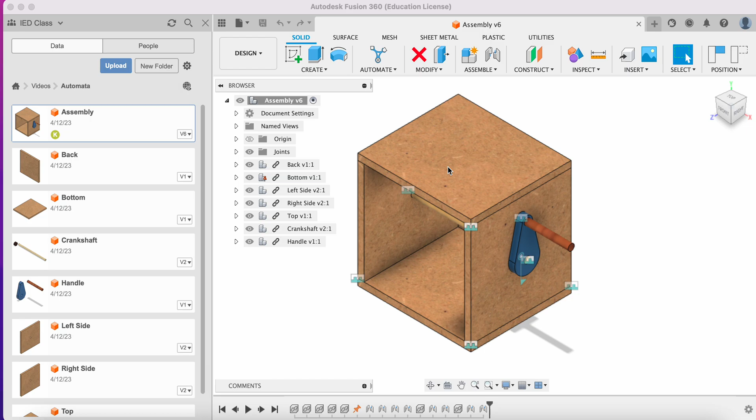Let's go ahead and open the top box file here, because we need to go ahead and insert a row of holes along the top. So let's go ahead and create a sketch right on that top plane, and I'm going to rotate this just so I can see it nice and long ways here.

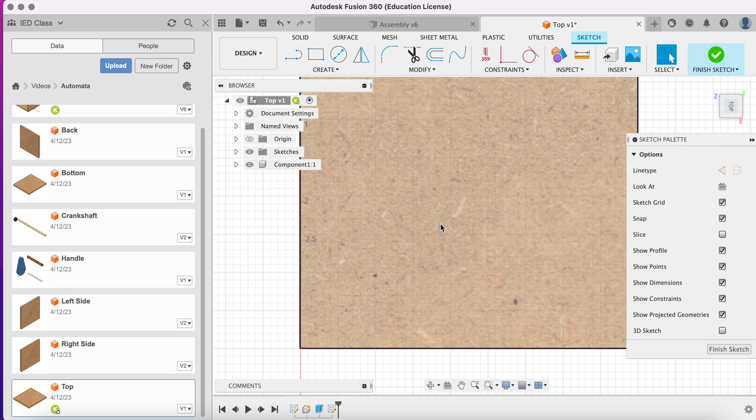Next up, let's take a look at, well, I'm having trouble zooming out. That's a problem, because I just want to see my whole box. So we're going to place a row of circles here, let's find that midpoint and drag along, and let's place a 0.25 inch diameter hole, and let's dimension from the left side to this as 0.58.

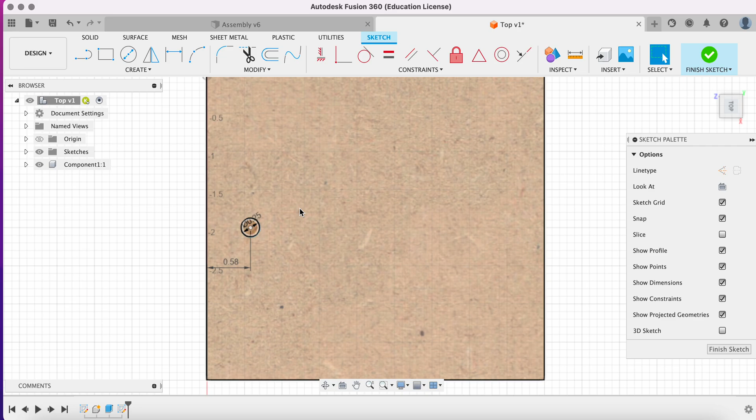And then what we could do is we could certainly go through and place 5 more holes and dimension between every single one of them, but that could get a little tedious. So let's go ahead and try to apply a rectangular pattern.

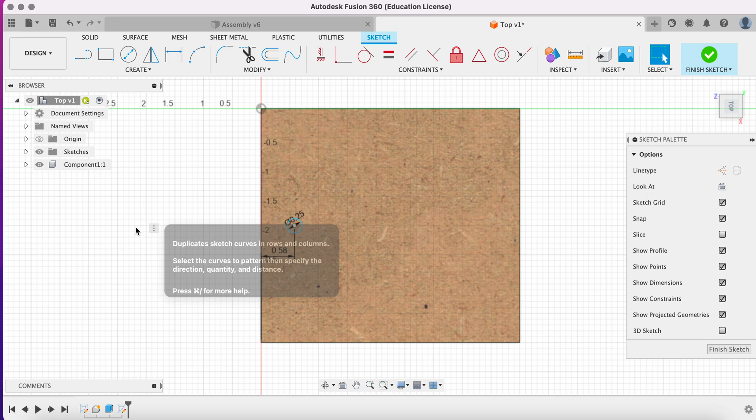So if you go under Create and choose Rectangular Pattern, the first thing that it wants us to select is the object, we want to repeat these circles. Next up is direction - oh, there are a lot of things underneath here, let's expand that, there we go. The direction, so I do want it to be horizontal, and I want it to go this way.

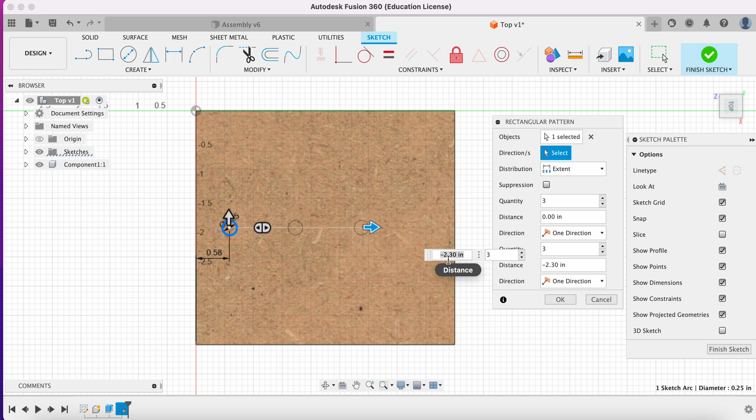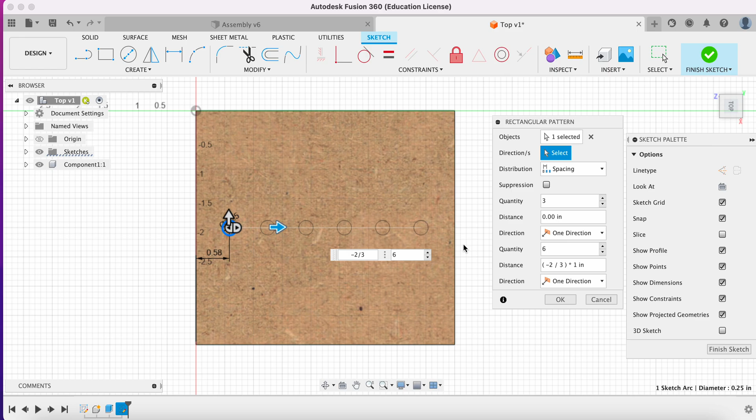Next up, they have a specific distance for us to put in, but I think I just want the extent to be spacing, based on a negative 2/3 of an inch. And instead of 3, we need a total of 6, because we made 6 cams, so we want to place 6.

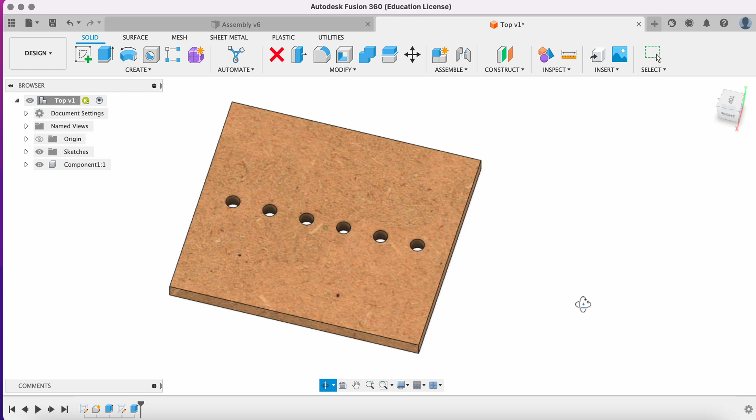So then go ahead and click OK. And now when we finish the sketch, we can extrude all 6 of these at once. So let's go ahead and click on all 6, and we're going to cut through and click OK. And now we have 6 holes for the follower rods to go through. So go ahead and save this up.

And let's head back to the assembly. Now, of course, to get those holes in the box, we do need to update. All right, so our box is looking really good.

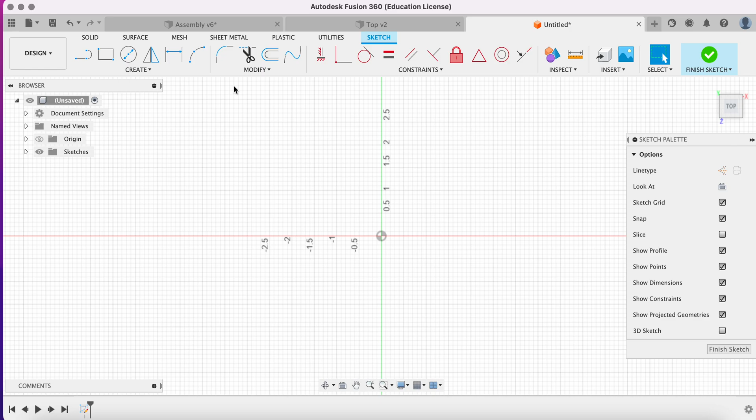Let's add a new design space, and let's make those follower rods. So create a new sketch, and I'll create a circle. And again, this needs to be a 0.25 inch diameter. And let's extrude these 3 inches. Create a new component, of course.

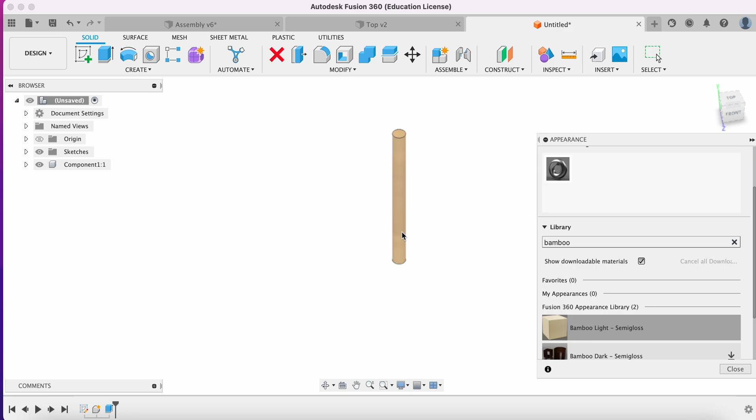And I'm going to have these made out of bamboo for my appearance. All right, that looks good. And let's go ahead and hit, well, we can save it, but we don't just want a flat spot on the follower rod. We do want there to be a rounded end to just ride smoothly along these cams.

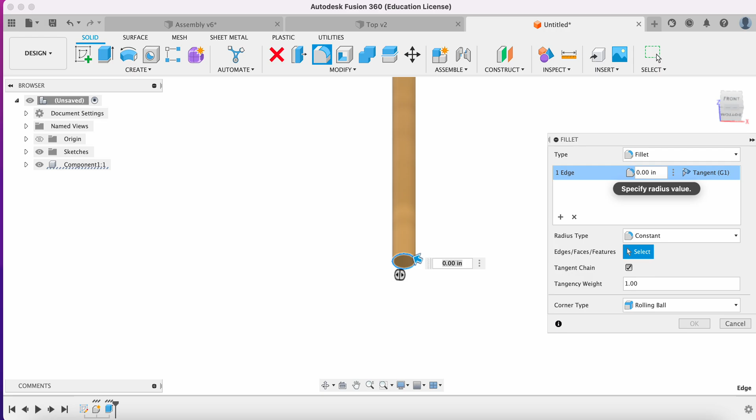So on the bottom here, I'm going to apply a fillet. So in the Modify panel, we're going to choose Fillet, select the circle at the bottom here, and change this radius value to be 0.25 divided by 2. So changing that radius amount, that makes it pretty smooth and kind of rounded.

And let's go ahead and save this as follower. And if we head back to the assembly, I do need to show my data panel again so that I can choose my follower to insert into current design. And it brings it right on in. And I'm going to click OK.

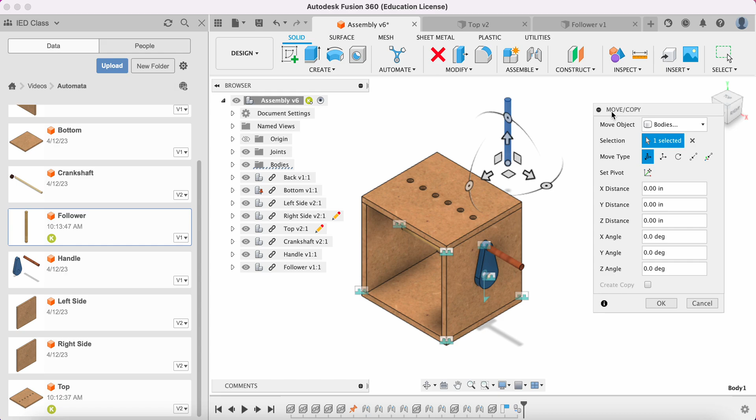And now I want 5 more of these. So yes, I could insert 5 more, but that can get, again, pretty tedious. So we could try to essentially copy and paste. So I'm going to highlight this, choose Command C, or for you it would be Control C and Control V. Click Capture Position is fine. And then when we drag it away, we see there are actually 2 separate followers here.

So that looks good, except I don't like how this came in. Okay, I'm going to delete that second one. I want it to pop up. How did that come in? Oh boy.

Did it lose the fillet? Oh boy, that's not great. Let's delete the fillet. Okay, let's try that again, because I highlighted all of it.

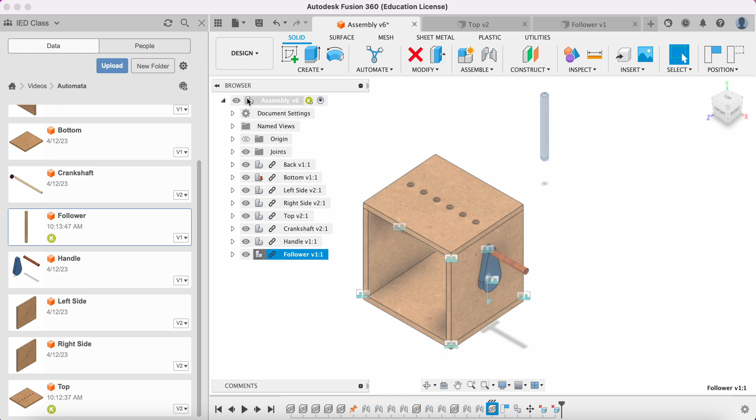Okay, if something isn't working quite right, let's try a different way. I'm going to left click on the follower here in the data panel, the browser panel, then right click and choose copy. Then I'll click on the assembly all the way at the top, right click, and choose paste. Capture position is fine, click OK. Now these came in the way I wanted at the bottom.

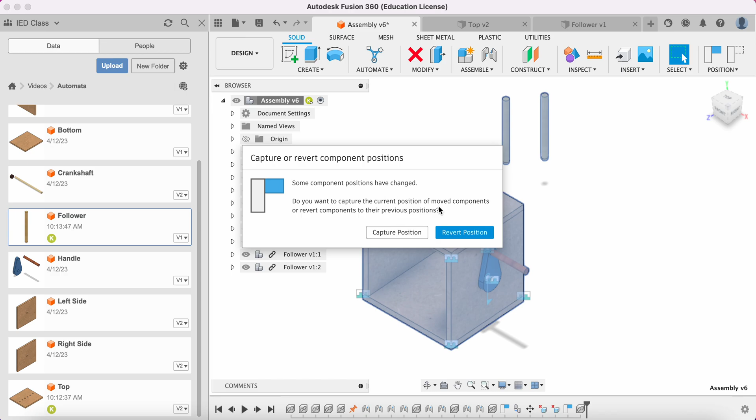Let's do that same process again. Right click, copy, right click all the way at the top, and paste. Capture position is fine. Okay, so we've got 3.

I'm going to try Control V one more time. Yes, and now that it knows what we want it to do, it's doing it correctly. Control V again, you can drag it out of the way, click OK. Control V one last time, drag it out of the way, click OK. We should see 6 followers down here. Make sure nothing else weird happened in there.

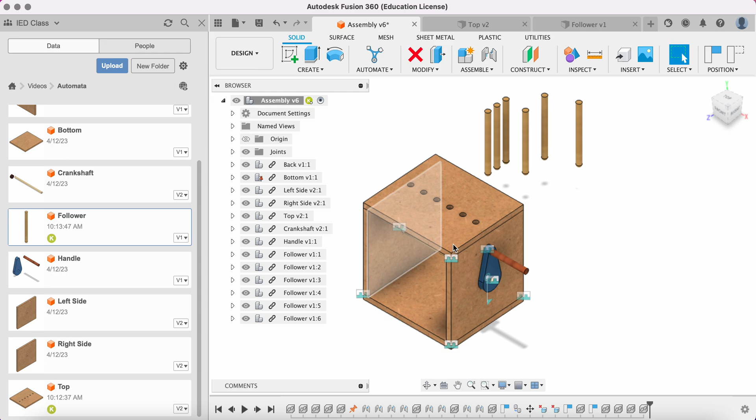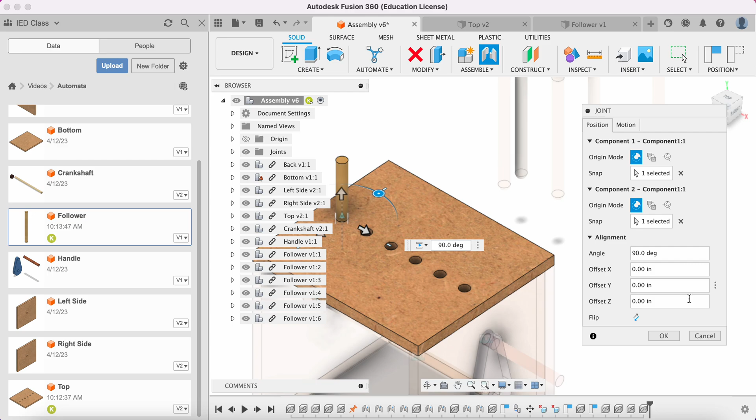Next up, we need to place a follower in each of these 6 holes. The joint we're going to apply is a slider joint, because we want it to slide along the vertical axis. When we click on position, click the middle of the follower for the snap point, then the center of the hole. If you want, you can preview the motion — that's exactly what the follower is supposed to do. So click OK.

And then we'll do that same joint again, right from the center to the hole, making sure the rounded side is down. If you constructed it the same way I did, it should be pretty automatic there. Looks good.

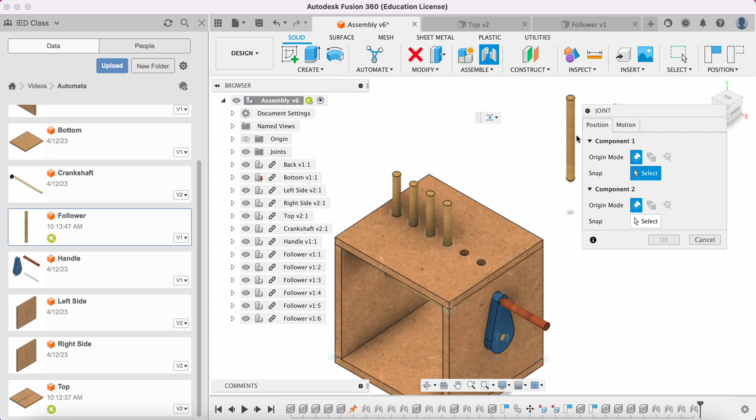And good, last one. So we now have all 6 followers in place, and they all have the correct motion. You can see the little arrows indicating that they are sliders.

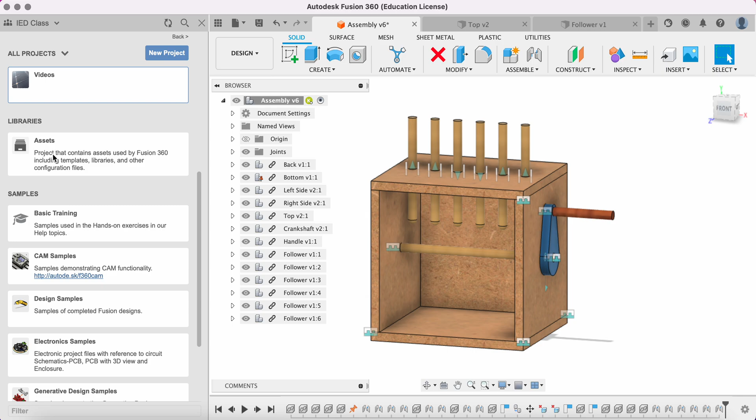Now let's go ahead and bring in our 6 cams. You might have to do a little searching in your projects for where you left off with your cams. Well, that's not where I left mine. There we go — I'm going to right click and insert each of my 6 cams.

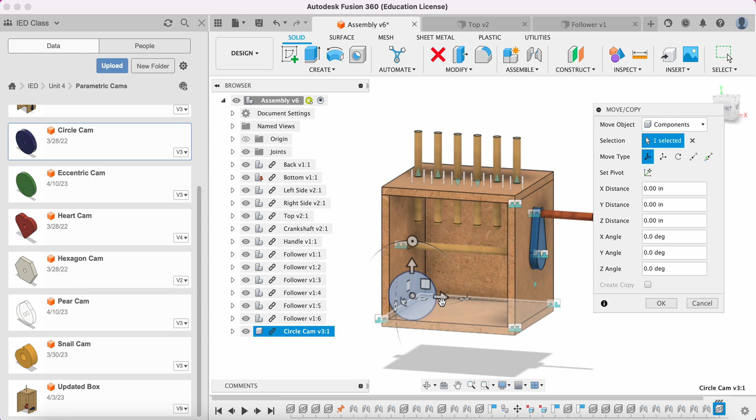We know that the circle cam's motion graph isn't very interesting, but bring it in anyway. Mine ended up back behind my box. Okay, eccentric cam — the order you bring them in, or the order you place them on your automata, does not matter. Just bring all 6 cams in.

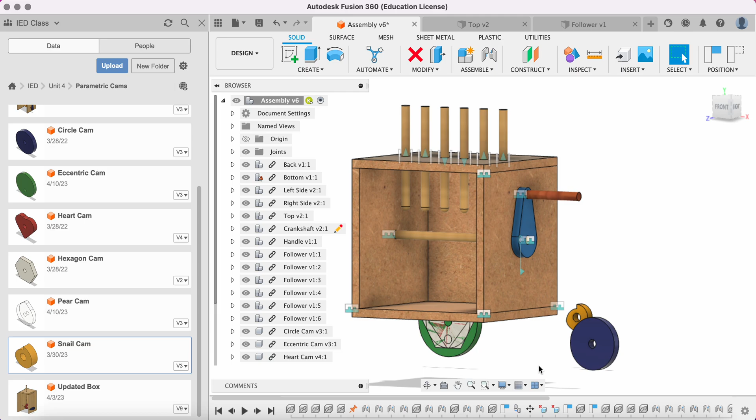I set them as different colors just because I think that's interesting — you can open up your files and set their colors differently if you'd like. The other thing is to make sure they're all sized so they'll fit in the box. You may need to go in and update your parameter D to be about 2 inches or less. If it's something small, that's fine, it doesn't have to be huge — 1 or 2 inches for that D parameter would be just fine.

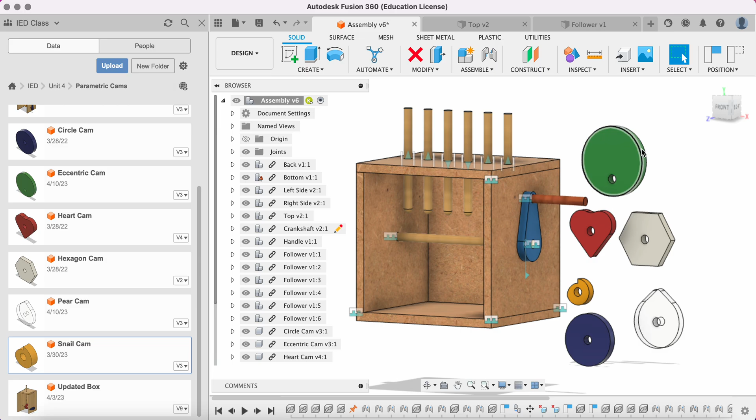All of these cams are going to be rigidly attached to the axle because we don't want them to slip — we want the axle to drive them and actually turn them. So let's make sure the motion is set to rigid on our joints, select the center of the cam hole, and then select the center of the axle.

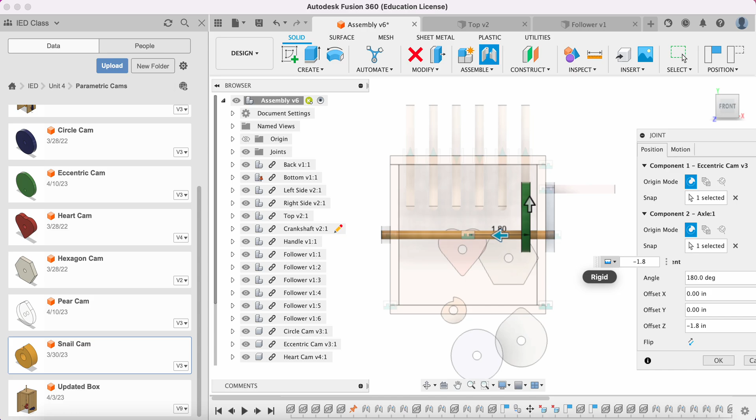Instead of trying to figure out exactly how much to offset it, we're just going to eyeball it a little bit. Negative 1.5, then it jumps to negative 2, so let's try negative 1.8. That's close enough, it doesn't have to be perfect. You can keep working on it if you really want to get it in there just so, but as long as it's close enough and it's underneath the follower roughly, that's totally fine.

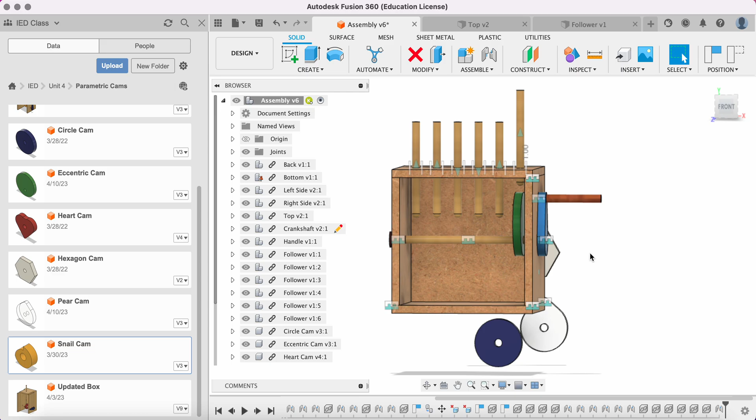If you don't like that the follower is sticking through it, double click on the slider and drag it up, then press enter. That looks good. All right, next cam — again, doesn't matter which one — center of the hole, center of the axle, viewing it from the front, dragging it underneath, and making some adjustments.

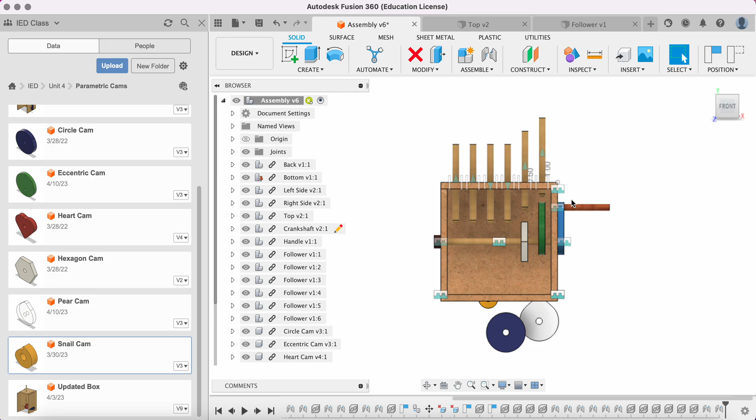Oops, negative 0.8. Yeah, as long as it's close enough, it's good. And again, if you want to move your follower, you certainly can. So repeat that rigid attachment process with all 6, and we'll come back and get the rest of the cams taken care of and get our motion working in the next video.